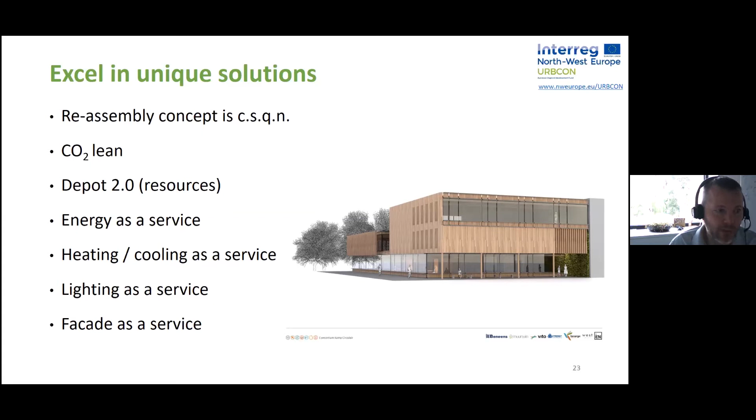So it's really a service provider. Consider it like your telecom provider. During time, you will get more bandwidth for the same amount of money, but sometimes they will ask you a little bit more money to improve their network as well. So that's the way we want to deal with heating, cooling, lighting, facades. Maybe other things will come up.

And we really pushed the envelope because a lot of topics came up during these latest few months, which we hadn't thought of: legal issues, how to deal with financing, are our organizations ready to help us out? Can we keep the budget under control? Really, the world was not ready for us, but we are slowly making progress. I just added here the timeline.

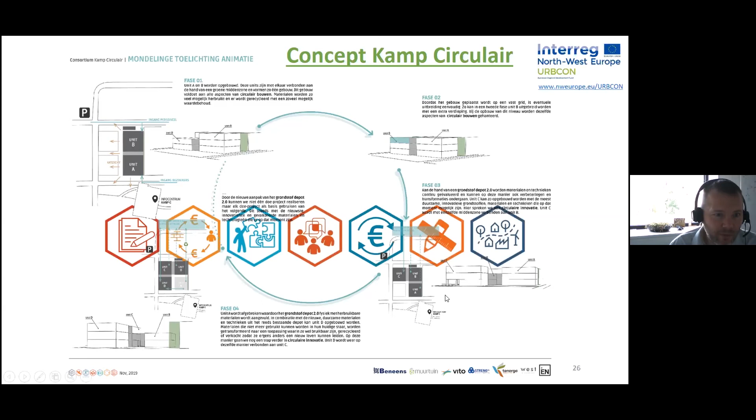I'm going to do one more thing, and that's show you the video, but the video starts really slow. I don't know why.

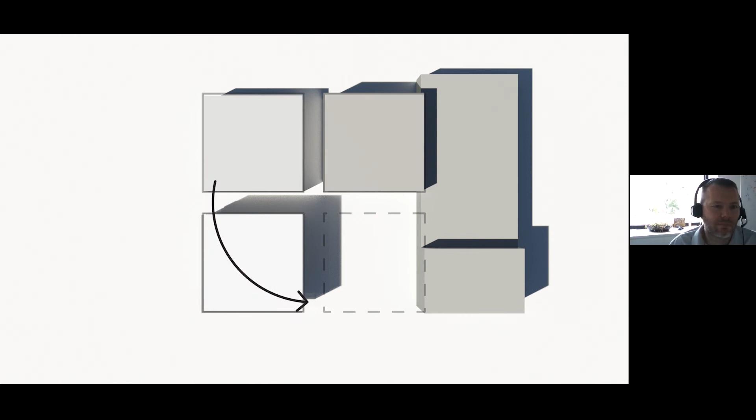Anyway, it shows you a little bit how we envisioned the master plan of the site here at Camp C. And if you have questions, then I'm ready to answer.

Thank you, Stefan, for your story. So, Anna, can you see if we have any questions in the Q&A box, please? Yes, we have no new questions about Centrum, but I suppose people are still typing their questions. But we have a question from Ger van der Sande, more general about the concrete in the project. Ger, maybe you want to take the floor yourself? I think that's not possible.

Okay. So his first question was, how is reinforcement considered in the program of the URBCON project, especially for structural concrete? So what about the reinforcement of the concrete? Maybe I'll take this question since it's more a technical one. So compatibility with reinforcement with the steel is of course very important, and it is also being heavily researched by the TU Delft and the University of Ghent. So tests like chloride ingress or carbonation, which basically turn the concrete more acid over time, which then could possibly corrode the steel. All of these things are of course also being looked into for this new type of concrete.